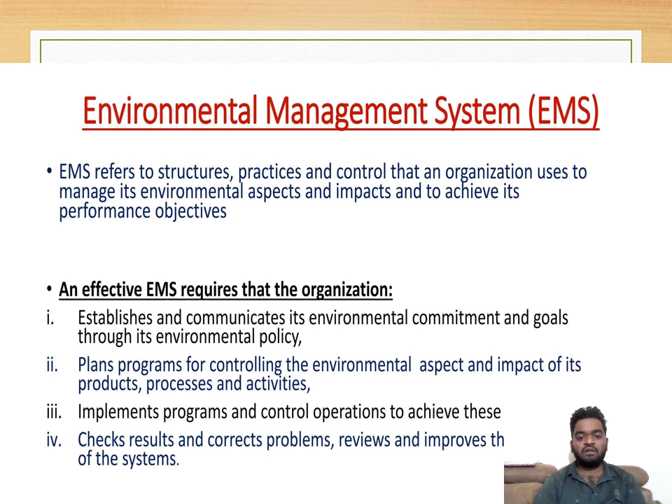Plan programs for controlling environmental aspects and impacts on products and process activities. Implement the programs and control operations to achieve this. Check the results and correct problems to improve the systems.

The textile industry: an overview. India is the sixth largest exporter of textiles and apparel in the world. India is one of the largest producers of cotton and jute in the world. The domestic apparel and textile industry in India contributes 5% to the country's GDP, 7% of industry output in value terms, and 12% of the country's export earnings.

Top textile companies in India are Arvind, Vardhman Textiles and Raymond, etc.

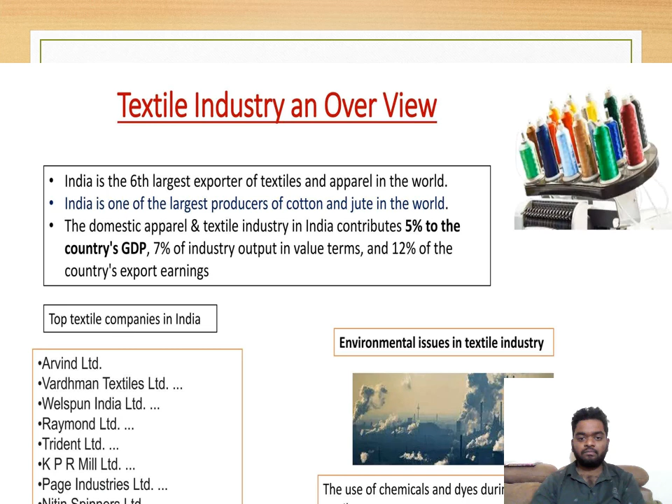Air and water pollution prevention opportunities in the textile industry. The industry is one of the most pollutant-releasing industries in the world.

Surveys show that nearly 5% of landfill space is consumed by textile waste. Besides, 20% of all freshwater pollution is made by textile treatment and dyeing.

Pollutants released by the global textile industry are continuously doing unimaginable harm to the environment. It pollutes the land and makes it useless and barren in the long run.

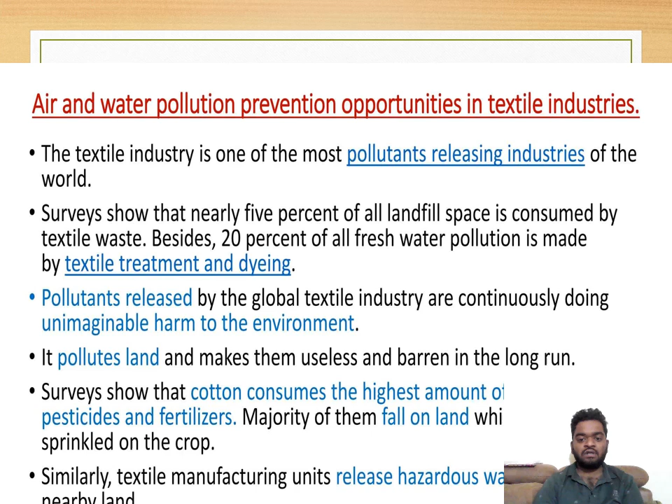Surveys show that cotton consumes the highest amount of pesticides and fertilizers, with the majority sprinkled on the crop land. Similarly, textile manufacturing units release hazardous waste onto nearby land.

After assessing and developing a clear understanding of the significant environmental aspects of their products, services and activities and the impact they have on the environment, the main features of their policies include reviving and improving traditional manufacturing processes of natural dyes and coloring processes.

Continuously integrating and developing environmentally more acceptable products such as naturally grown colored cottons, minimizing wastage, and conserving resources such as water, energy, oils, chemicals and papers. Reducing water, air and noise pollution and land contamination, and compliance with relevant environmental legislation and regulations.

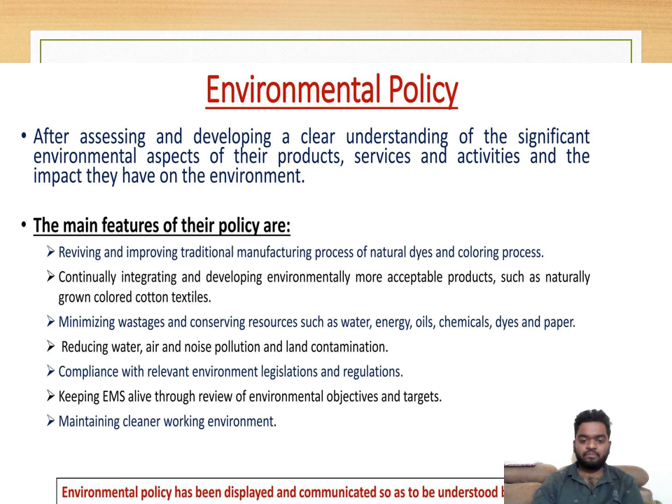The next topic is: why a waste audit? Discover what waste you generate. What are you not recycling? What will you find that you don't expect?

Review the purchasing management decisions and how to reduce waste, how to recycle, how many more bins are needed, what system to put into place, and what training is needed.

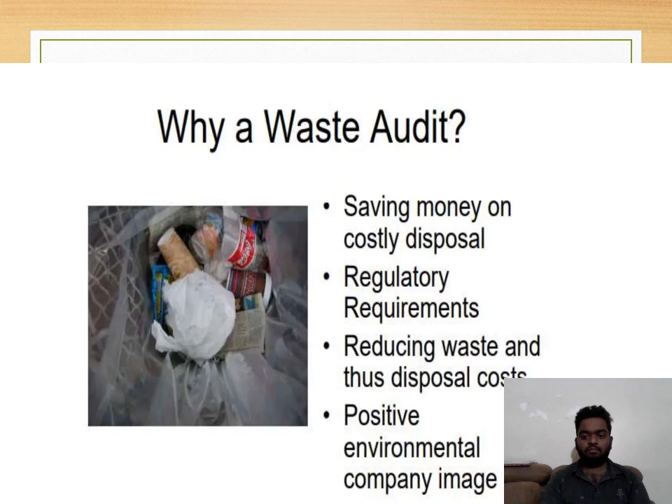Features of a waste audit: a good waste audit should define the source, quantity and types of waste being generated; bring together information on unit processes, products, raw materials, water usage and waste generation; highlight process efficiency and inefficiency; identify areas of waste, losses and waste problems; identify the constituents of the waste; help set targets for waste reduction; and permit development of a cost-effective waste management strategy.

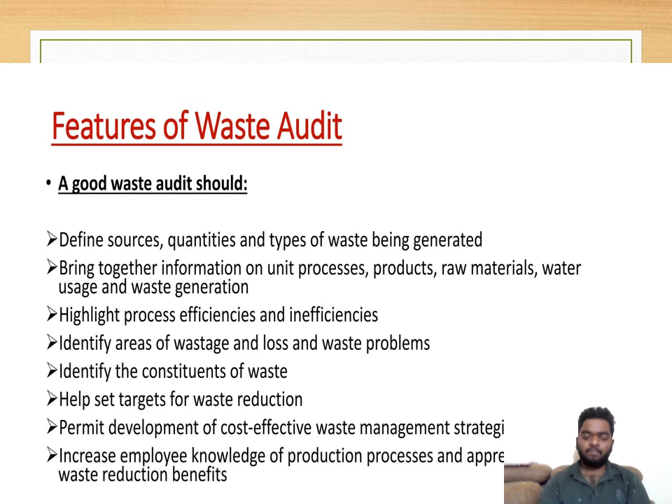The next topic is the pulp and paper industry. India is a vast country with an average of 700 pulp and paper mills. It is one of the highest polluting industries in India and is highly water intensive.

Relatively large wastewater discharges and accompanying release of high pollution loads into the environment are the sequel of high water consumption and pollution generation in the process of pulp and paper manufacturing.

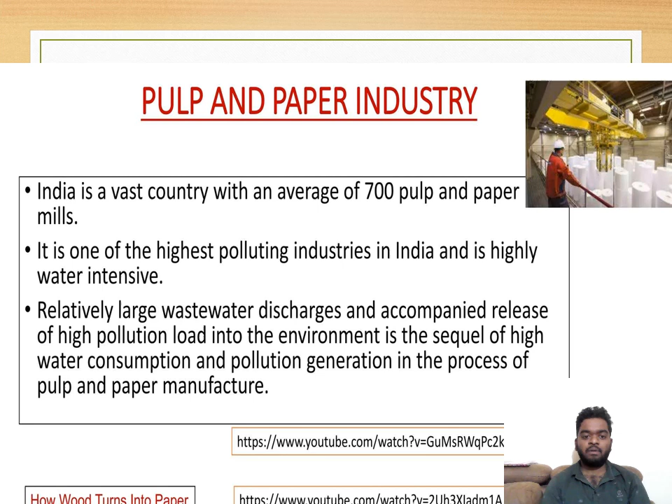Environmental management in the pulp and paper industry addresses the sources of waste generation. In the pulp and paper industry, a considerable quantity of water is used in the paper making process. The quantity of water consumption varies according to the quality and kind of paper to be manufactured. In addition, considerable amounts of solid waste and gaseous emissions occur.

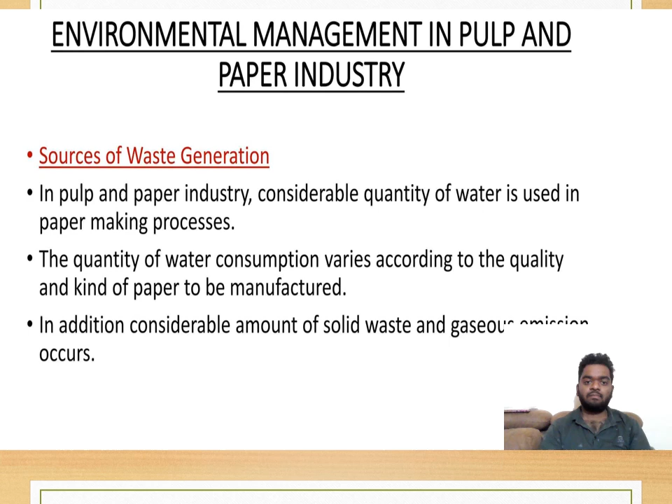Here, the wastewater generation is done by the pulping and paper processes.

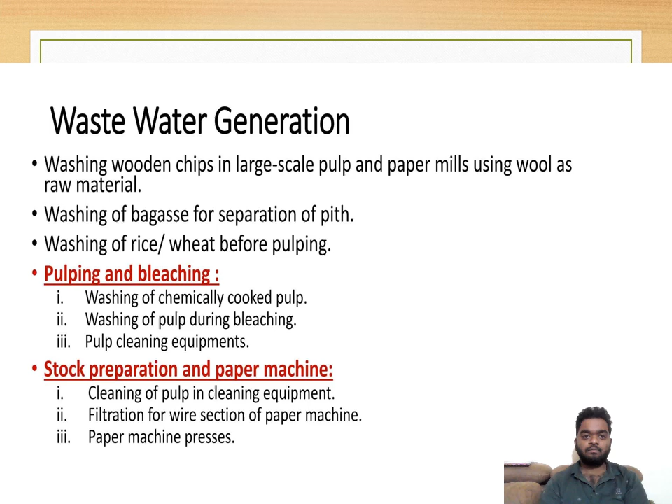The next topic is solid waste generation in pulp and paper. In the pulp and paper industry, solid wastes are generated from the following operations: raw material handling, rejects from screening and centri-cleaners, primary and secondary sludge from wastewater treatment, coal or boiler ash from steam and power generation, and lime sludge from the causticizing section of chemical recovery.

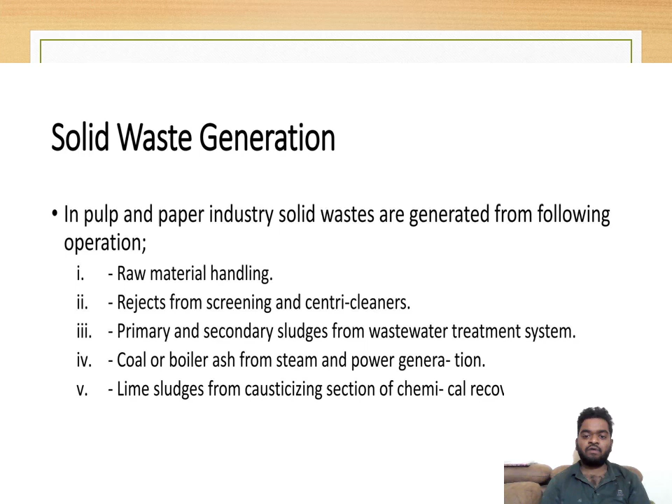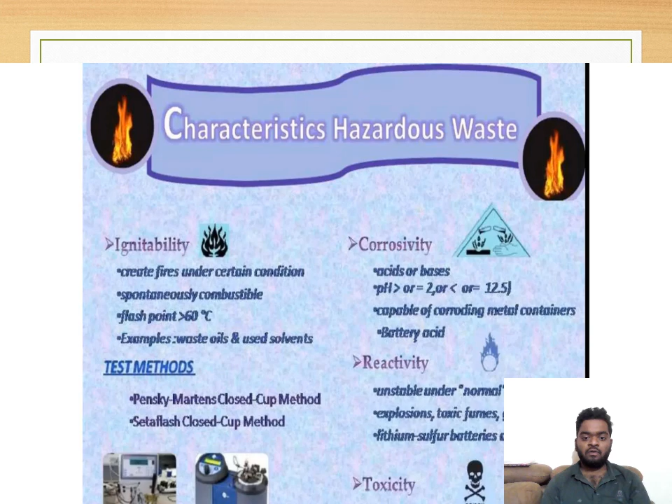The characteristics of hazardous waste: ignitability creates fires under certain conditions, and spontaneous combustibility, corrosivity and reactivity are also characteristics. The test methods are the Pensky-Martens closed cup method and the setaflash method.

Major types of hazards: cultural hazards, chemical hazards, physical hazards, and biological hazards. Chemical hazards cause harm by being flammable or explosive, irritating or damaging the skin or lungs, or interacting with and preventing oxygen uptake and distribution.

There are types of hazards: biological hazards, physical hazards, and there are two methods of recycling hazards. Many times it is possible to use waste for another purpose which eliminates it as waste. For example, waste oils can be used as fuel for power plants.

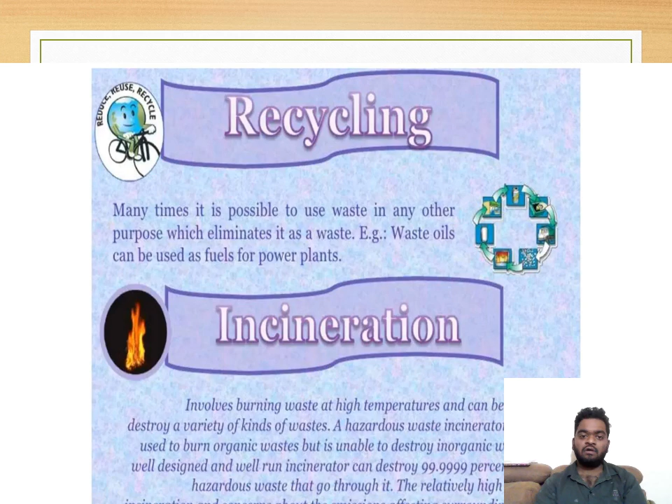Land disposal is still the primary method for disposal of hazardous waste when all other options have been exhausted.